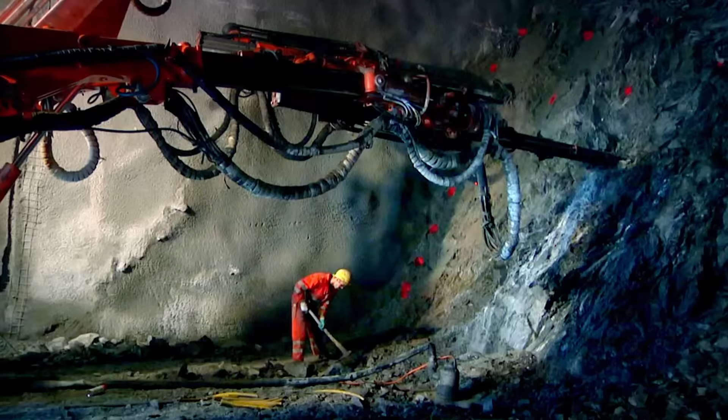Deep at the heart of the Swiss Alps, under millions of tons of rock, engineers are building a technological masterpiece, the Gotthard Base Tunnel. It will be a jaw-dropping 57 kilometers long, the longest tunnel in the world. It is the pinnacle of tunnel engineering.

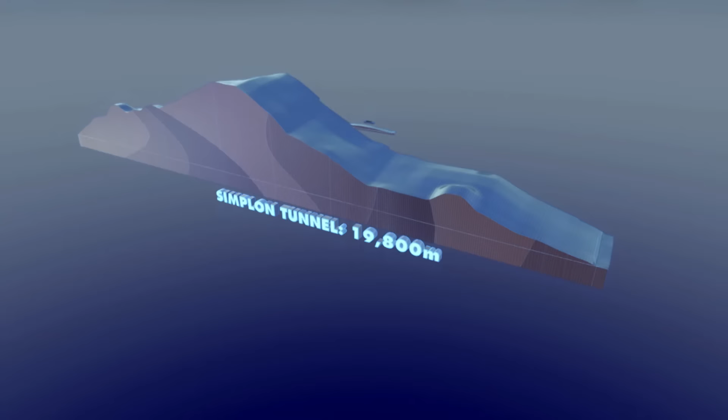The Gotthard Base Tunnel owes its success to 6 landmark tunnels. At the heart of each lies a major technical innovation that allowed engineers to drive their tunnels ever further. One by one, traveling up the scale, we'll reveal the incredible stories behind these astounding feats of engineering and the inventions that allowed them to grow ever longer. 6 ingenious leaps forward, from big to bigger, into the world's biggest.

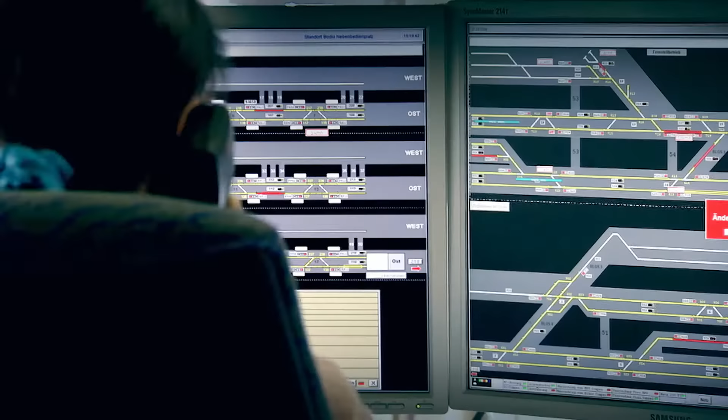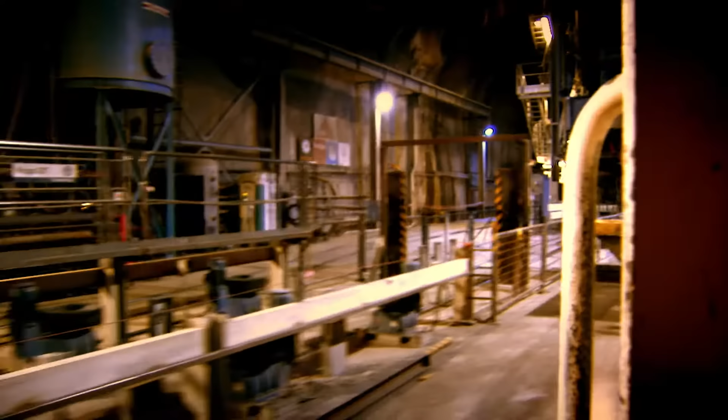Every day, 2,000 workers descend into the dark recesses of the Swiss Alps. Ignoring human beings' innate fear of going underground, they brave the heat and dust to complete a mammoth engineering project. Their mission is to build a tunnel that will solve one of the biggest traffic problems in Central Europe. There are only 4 roads across the Alps, all of them badly congested. But now the Swiss are about to break the gridlock.

They will link their biggest city, Zurich, to Milan in northern Italy. From 2017, high-speed trains will make the 200-kilometer trip faster than an aeroplane. But to make this happen, the Swiss must overcome a huge obstacle. They must break through the Gotthard Massif, towering over 2 kilometers above.

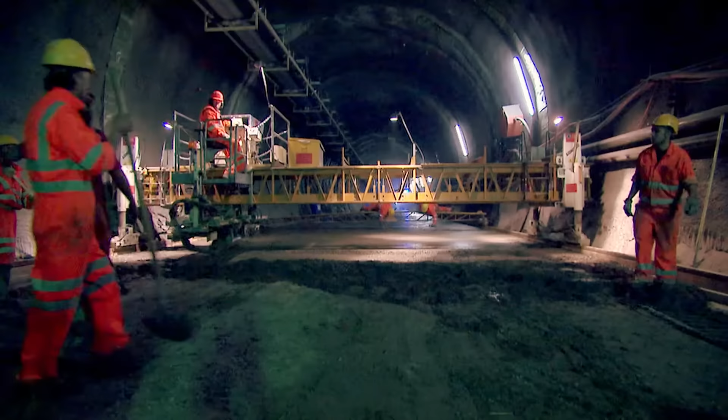If anyone can do it, it's the Swiss. They have turned tunneling into a fine art. For the last 13 years, men and machines have been working round the clock to build their masterpiece, the Gotthard Base Tunnel.

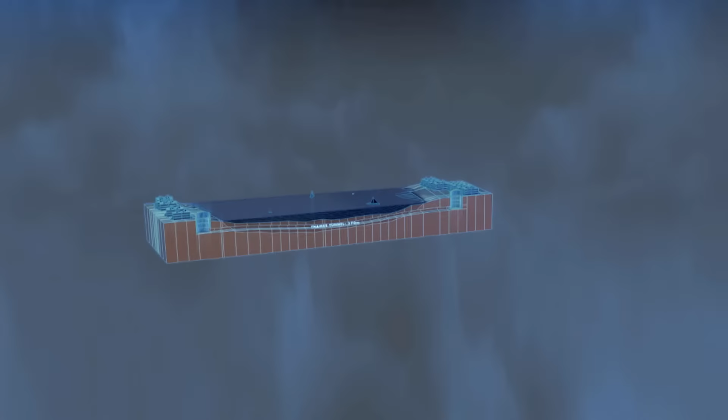To understand how the Gotthard Base Tunnel can be this big, we must travel back in time. In the 19th century, London engineers wanted to build the world's first underwater tunnel beneath the River Thames. But first, they would have to stop the weight of the river from crushing it.

Traffic problems in London are nothing new. It may seem bad today, but it was even worse 200 years ago. In the 1800s, this is the busiest port in the world by miles. Britain is a dominant imperial force and all its trade, or most of its trade, comes through the port of London. This thing is stacked 20 deep with tall-masted ships going across the river. So bad is it, in fact, that to get your freight from one side to the other could take you longer than putting it on a cart and taking it to Scotland.

The trouble is that the bridges across the Thames are badly congested, and building new ones just isn't an option. You want to get from one side to the other, and bridges are really difficult. They're difficult here because you've got tall-masted vessels, and to get underneath the bridge has got to be really, really high, and the approach ramps will end up being miles long. A bridge is not the answer.

Then a French engineer called Marc Brunel has a vision: a tunnel under the Thames. But Brunel knows that digging such a tunnel is fraught with danger, as the ground under the Thames is extremely treacherous.

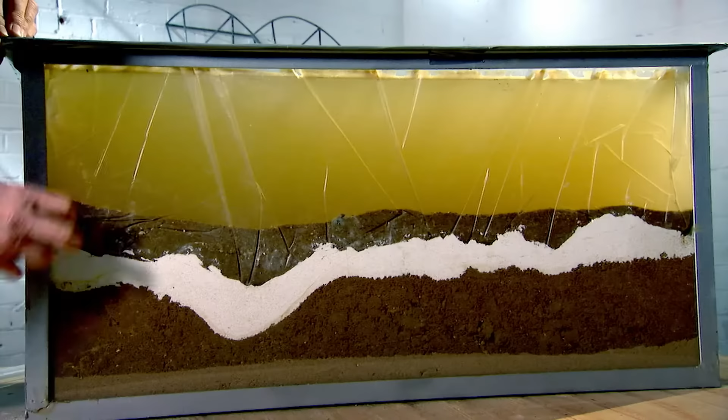Here we have the Thames in a jar, or a fish tank, to be more precise. And what we see is the River Thames looking suitably murky, and on the bottom of the Thames, alluvial sands and gravels and things like that. Underneath that, we've got a layer of clay, and that's good stuff to tunnel through. It's the stuff we want to find.

The challenge for a tunneler is to stay within the good tunnelling ground. If you drift too far out of it, you're in trouble. So let's have a go with our tunnelling device, shall we? I'm going to try and stay within the white band, which is our clay band. Oh, and we can see the water coming in there. So I've bust through, and there we go. Welcome to the River Thames.

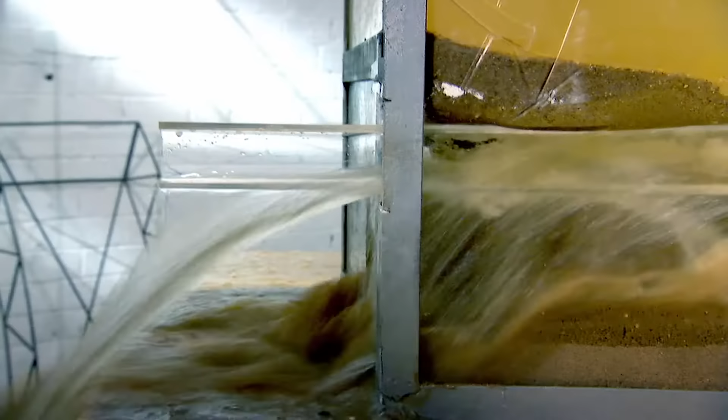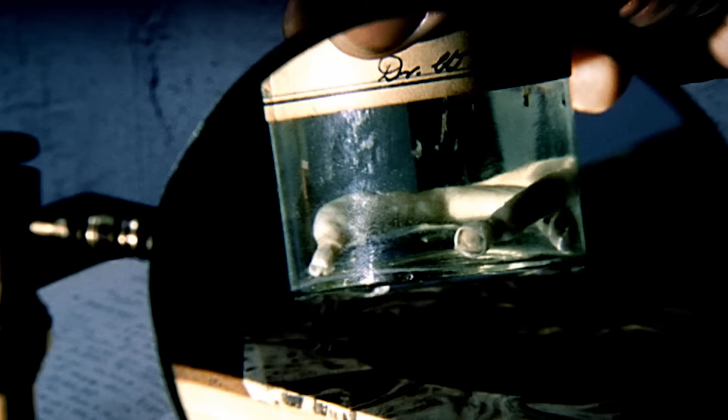But Marc Brunel thinks he has the solution. He finds inspiration in an unlikely place. Marc Brunel is working in the Chatham dockyard, and he's working in a land of wood. Ships are made out of wood, and he notices that there's a little mollusk called the shipworm that burrows its way into timber, but he's struck by how does the shipworm do this, and why doesn't the tunnel squeeze in on them afterwards? The shipworm is a clam that wears its shells on its head.

The shells have serrated edges. They can cut through even the toughest wood as the shipworm pushes forward. But there's a problem. Wet wood swells over time. This could close the tunnel and squash the animal.

So the shipworm has a clever trick to stop this from happening. It secretes a slimy substance that hardens into a tough protective shell around its soft body. As the shipworm advances, the rigid lining keeps the tunnel from collapsing.

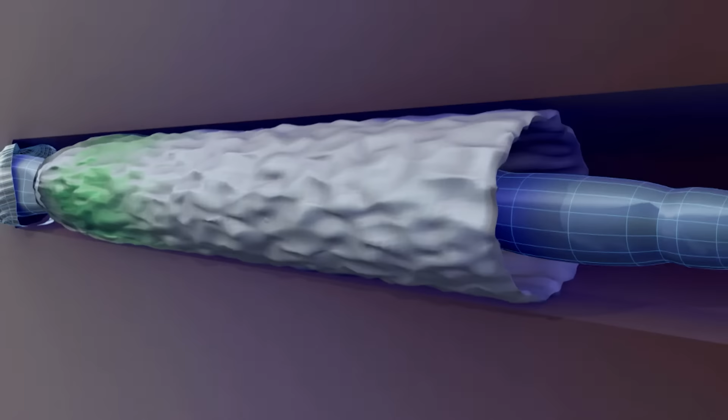What Brunel does is what lots of people have done through time: they've found a problem that looks just like theirs, and realized that if they can replicate the key parts, they can use the solution somewhere else. Here he's figured out that the shipworm is actually solving the same problem as him. It's boring through something that wants to squash down afterwards.

Marc Brunel builds a machine that uses the tricks of the shipworm on a huge scale. He calls it the tunnelling shield. The machine is made of 36 iron frames that each hold one miner. Wooden boards shield them from the unstable workface. They remove one board at a time and dig out 10 centimeters of mud.

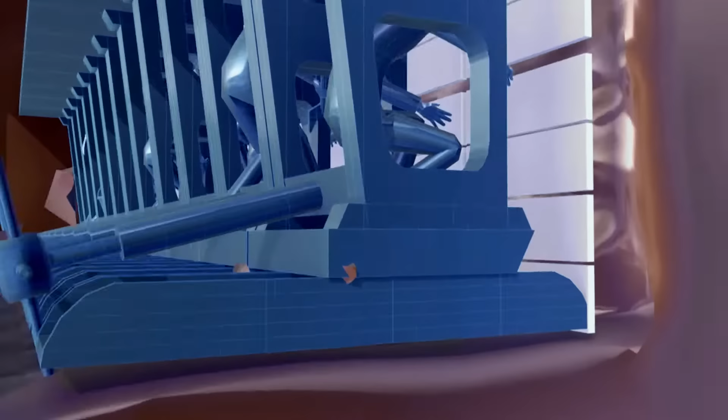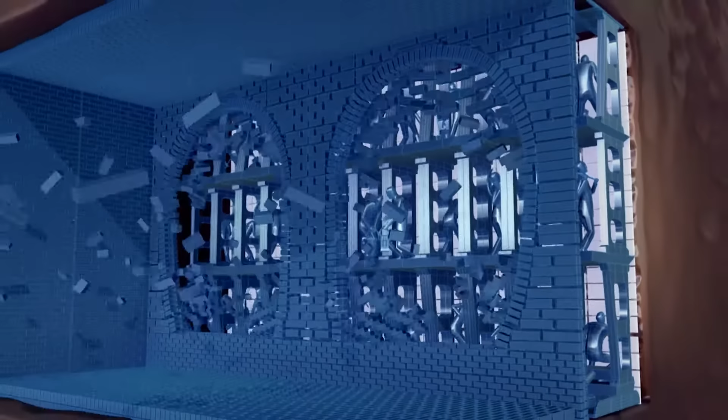Once they've taken away a whole layer of mud, they use jacks to push the frame forward. This exposes a narrow gap of unsupported mud. Like the shipworm, Brunel immediately lines the passage before it collapses. He uses bricks and extra strong cement to create a sturdy twin-bore tunnel. This machine becomes the key to tunneling under the Thames.

Brunel's Thames tunnel survives to this day, but it shows no trace of the horrors that the workers endured to build it. Where we are now is at the bottom of the Rotherhithe shaft. And the men would have come down from Rotherhithe every day, and they would have climbed up the ladders onto the shield with their picks and shovels, and away they would have gone.

And at the beginning, I imagine it was pretty much okay. They'd have been figuring out how to use the shield, but the ground here isn't that bad. But once they got down into the middle, it would have been a pretty hairy business, especially once they got right underneath the river.

Brunel's shield stops the tunnel from collapsing, but it offers no protection from the filth under the River Thames, which in those days is an open sewer. They can only work for 2 hours at a time because methane is being released from all this rotting crap on the bottom of the Thames.

Some of them will be getting sick, so they would be taken to the back, slapped about a bit, they'd revive, and they'd go back and do another shift. It's desperate stuff. The stuff they're digging through at its worst is so horrible it'll rot your fingernails.

Today, it takes only 45 seconds to travel through the tunnel that took Brunel's team 18 years of toil to build. And they couldn't have done it without his mechanical mollusk.

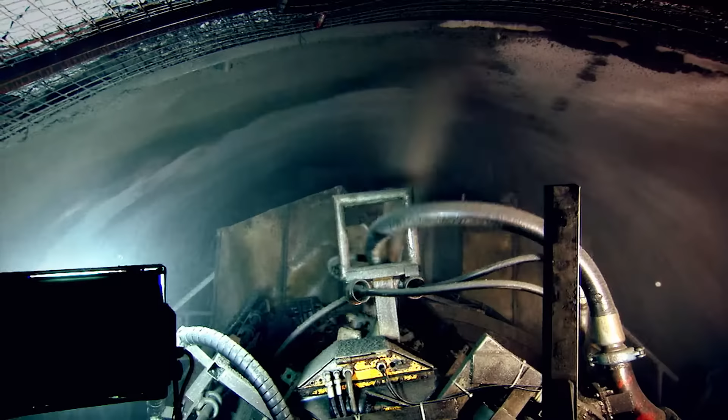Brunel's idea was so brilliant that the principle is still used today on the Gotthard Base Tunnel. The team working at the face also strengthened the tunnel walls immediately. Only instead of bricks, they spray on a special concrete that hardens extremely quickly. It's called shotcrete. The shotcrete forms a stiff tube around the tunnel that stops it from caving in on the workers.

It is the ultimate reincarnation of Brunel's mechanical shipworm. But sometimes the ground the team are tunneling through is so treacherous that the shotcrete alone can't do the job.

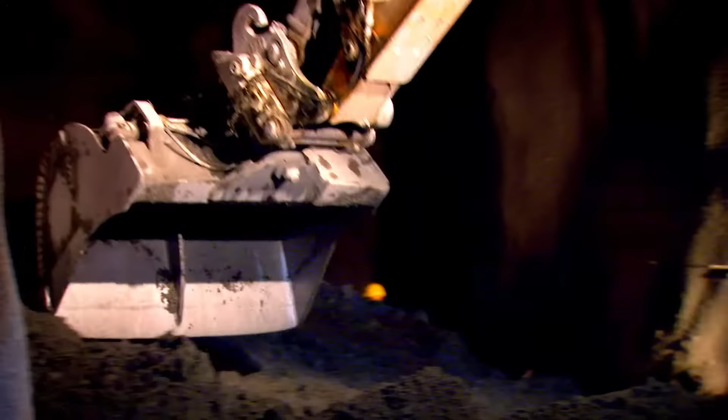We are drilling the tunnel in very bad geological conditions. You can see here the quality of the rock. It is soft rock, and this rock will close. It is a squeezing rock.

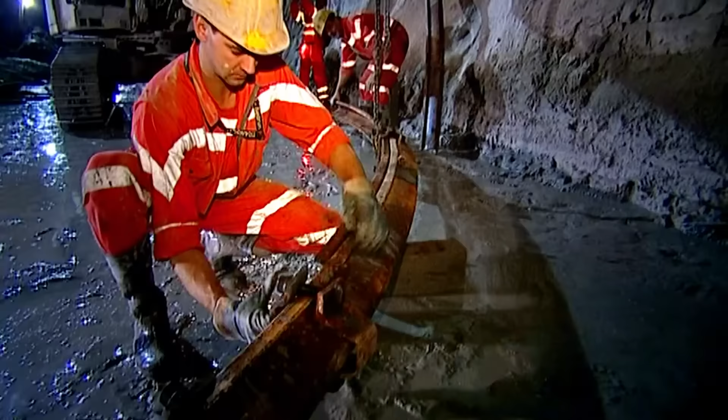The soft, squeezing rock could easily bring down the tunnel, so the engineers must strengthen it with steel arches. But to survive the force of the mountain pressing down, these arches have to be very special. If the engineers used arches made from long steel beams, the crushing pressure from the mountain could prove too much for them.

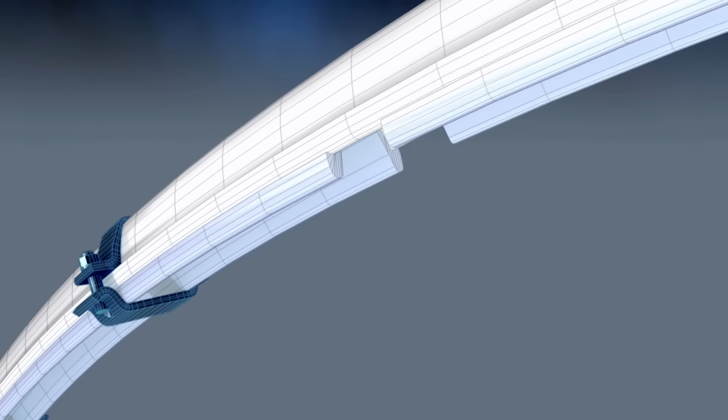So they use arches made of many short segments. Each segment overlaps with its neighbor. They're tied together with steel clamps that still allow them to slide over one another. As the mountain squeezes down on the arches, friction between the arch segments gets stronger until they finally lock together. And once the mountain settles, the arches are secured with shotcrete.

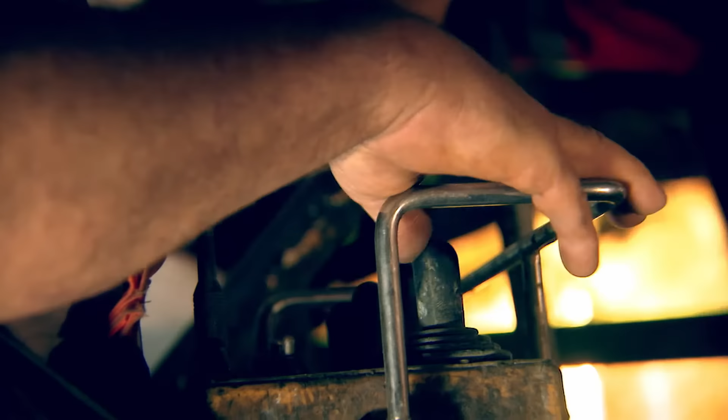The engineers at the Gotthard have learned their lesson. The key to stopping their tunnel from collapsing is not to fight the mountain, but move with it.

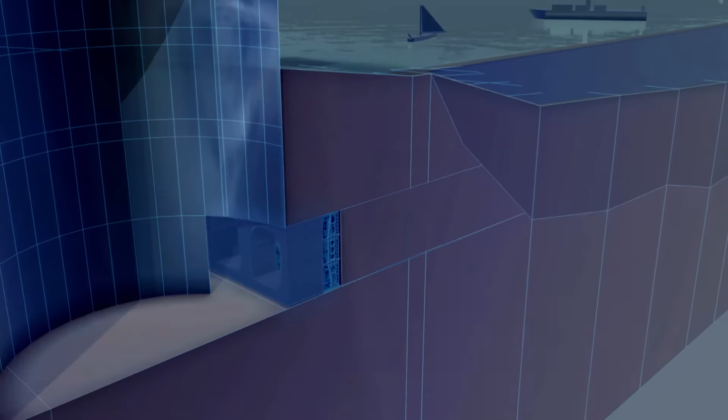In 1825, Brunel's tunneling shield revolutionized engineering. But excavation was still done by hand and was painfully slow. To take the next leap in tunneling evolution, engineers had to overcome this problem.

To build the much longer 3-kilometer box tunnel through solid limestone, they would have to find a faster way to excavate.

In 1833, the port of Bristol decided to build a railway line to London to boost trade. The man they picked to do the job is Marc Brunel's son, Isambard. This guy is so ambitious, it defies belief. He's in his late 20s and he goes for the biggest railway gig in the land, not a small thing. He's 25, 30 years old, and he is going to build the most speedy, comfortable railway ever seen.

Brunel surveys a 200-kilometer route on the flattest possible path between London and Bristol. But just before the end, he faces a formidable obstacle, Box Hill. If Brunel lays his track up and over the hill, the slope will be too steep to climb. If he lays the track around the hill, the detour becomes too long.

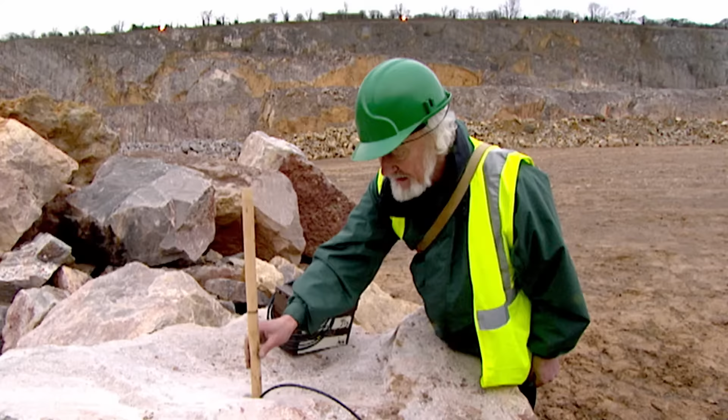What you must not do when compressing it in the hole is use a steel tool, because if you have any sparks at all, the gunpowder will ignite. Now what I've got to do, I'll take my explosives out of the way, and I'll use some gravel and put it on top of the gunpowder in the hole. This will confine the gas which is generated and cause it to exert its pressure for as long as possible on the rock. It's all done with pressure.

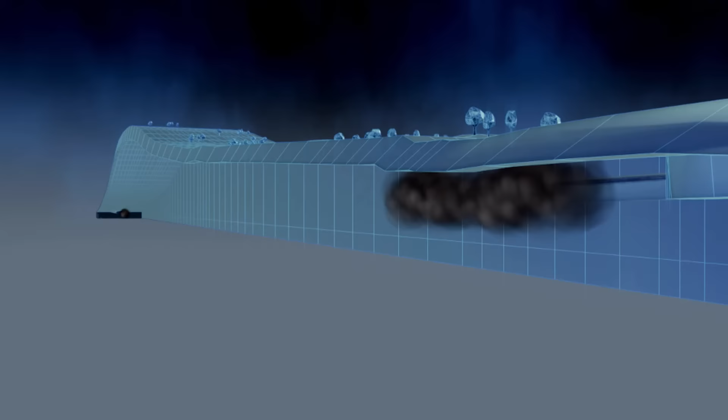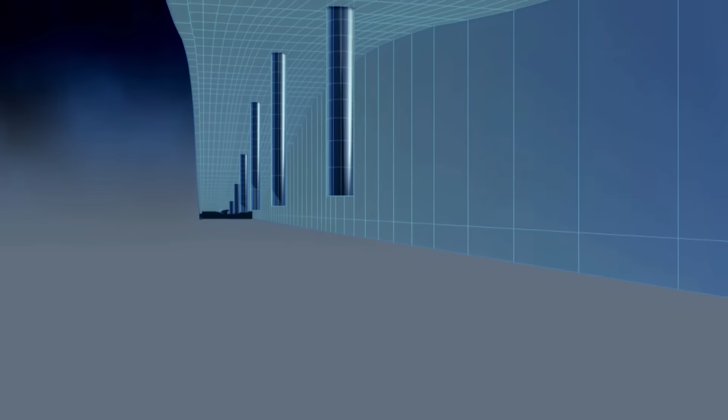Gunpowder becomes Brunel's weapon of choice. He starts by blasting into Box Hill from both ends to speed up the digging. And to accelerate it even more, he also drives 8 deep shafts down through the hill along the tunnel's proposed route. These shafts create 16 extra tunnel faces inside Box Hill, so more crews can attack the mountain from many fronts.

But the blasting has a serious side effect. Gunpowder generates, when it explodes, quite a lot of gas: steam, hydrogen sulfide, sulfur dioxide, and carbon monoxide. Carbon monoxide is intensely poisonous, and if you have several such bangs as this going off in a confined space, if you breathe too much of it for too long, you will become unconscious and you will die.

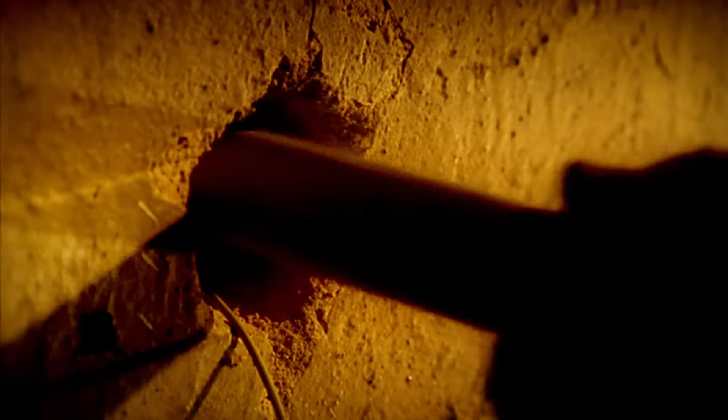Brunel uses a ton of gunpowder a week, which makes the tunnel a deadly place to work in. When Box Tunnel opens, it becomes the longest railway tunnel in the world. But over 100 men have lost their lives building it.

Today at the Gotthard Base Tunnel, the explosives are more powerful and safer than gunpowder. But the principles of drilling and blasting have not changed since Brunel's time. The crew must put their explosive charges in precisely the right place, otherwise their tunnel will end up the wrong size.

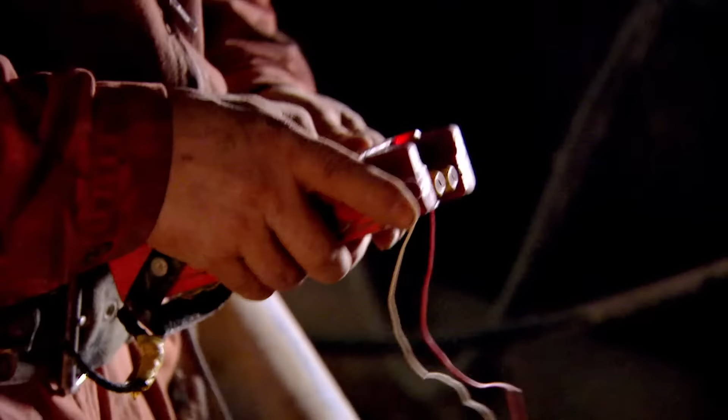Of course, there's a real art to drilling and blasting. I mean, rock is not a uniform material. It's got lots of different fracture lines in it and all the rest of it. And you're trying to get a hole precisely the right size, or pretty much the right size. If you get the charges in the wrong place, you end up taking great big lumps out, which is bad news because you have to fill it up and use more material. Or you don't blow enough out and you end up having to blow it up again. Understanding the effect of your charges is quite an art.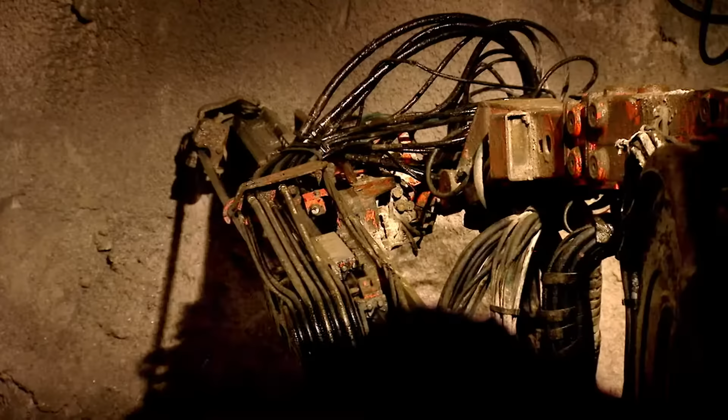But the builders at the Gotthard Base Tunnel aren't going to get it wrong. They have an amazing machine to drill the holes for the explosives, called the Jumbo. It has 3 laser-guided drilling arms that are computer-controlled and programmed with the exact dimensions and coordinates of the tunnel. They can drill a 4-meter deep hole in 2 minutes, accurate down to a few centimeters. The Jumbo creates a perfect pattern of boreholes, guaranteeing that when the blasters set off their charges, they can be sure to hit the right spot.

Back in 1841, Box Tunnel proved that blasting can speed up tunneling, but is also deadly.

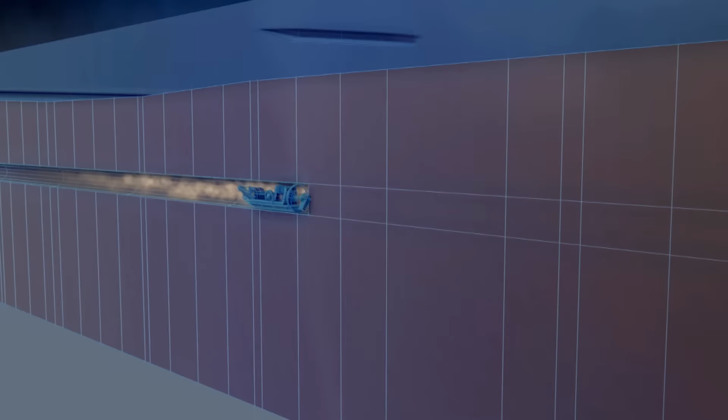At the end of the 19th century, Liverpool is one of the busiest cities in Britain, but many of its workers have a difficult commute. They have to cross the Mersey estuary by ferry. In 1877 alone, 26 million passengers take the slow boat from Birkenhead to Liverpool. What they need is a faster way across the Mersey.

So in 1879, engineer Francis Fox and a crew of 700 men begin blasting a tunnel under the estuary. They're trying to blow a bloody great big hole, and there's only a few feet of rock above them, and on top of that you've got the Mersey estuary. So the blokes start getting a bit concerned about this, and in fact Francis Fox, who's the chief engineer of the job, he comes down every night towards the end of the night shift just to check that everything's all right and the boys aren't getting sloppy, and he comes back one day and he's reported to have said that they're in a constant state of fear.

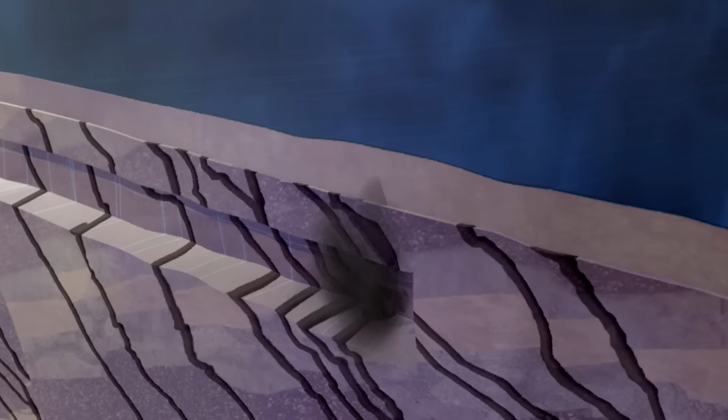Francis Fox's men believe that blasting under the Mersey is a recipe for disaster. The rock beneath the estuary is riddled with faults. The men fear that shock waves from the explosions could rip open these faults and bring the Mersey crashing down on their heads.

Francis Fox must keep up the pace of the work, but keep his men safe. So he introduces them to a machine that can bore tunnels.

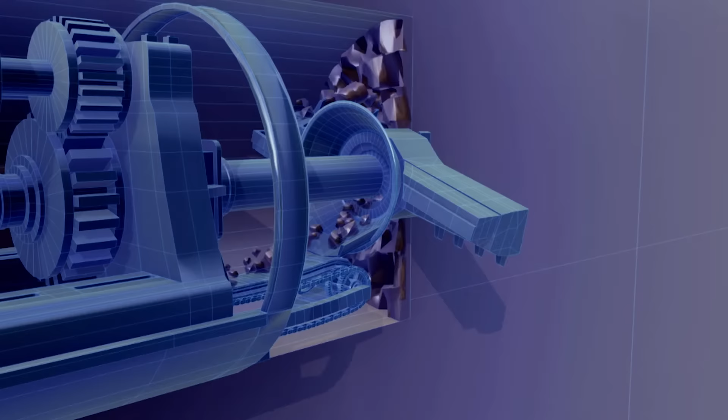The front of the machine has a huge rotating arm. This is fitted with sharp iron teeth. The teeth bite into the rock and rip out small chunks. As the machine pushes forward, the debris drops onto a conveyor belt and is carried out of the tunnel in railway tubs.

To move the drill on, hydraulic jacks lift the top of the machine off the ground. The frame then slides forward and the cycle starts again.

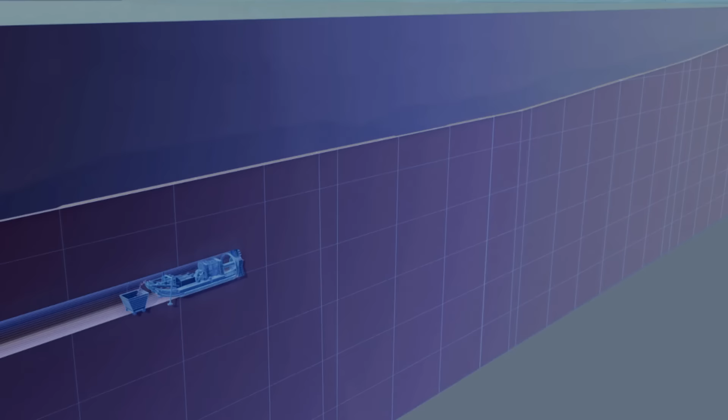The boring machine does wonders for the Mersey tunnel. It can dig up to 60 meters a week. On the 1st of February 1886, the Mersey Tunnel opens to the public and 36,000 people travel through it. To this day, it is the fastest way to get across the Mersey.

Before the first passenger can travel through the Gotthard Base Tunnel, the builders need to excavate over 20 million tons of rock.

For this Herculean task, the tunnel boring machine has had a bit of an upgrade. It's now as long as 4 football fields and has a cutter head that spans nearly 10 meters. This metal monster can munch its way through 40 meters of rock every day.

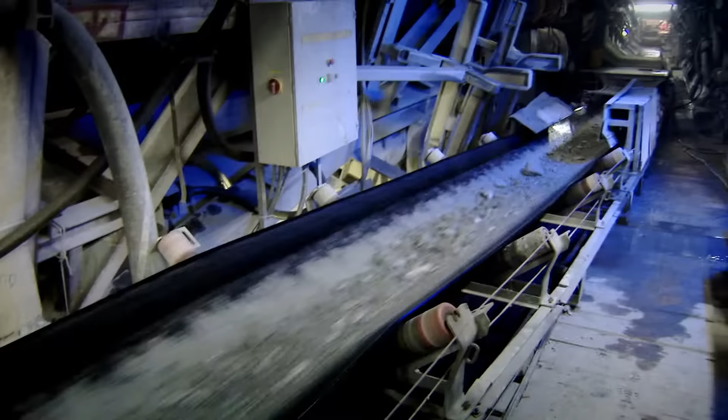On a good day, it can rip 6,000 tons of rock out of the mountain. And then, amazingly, it puts the rocks straight back in. Nearly a quarter of the material carved from the mountain is recycled and turned into concrete. This is sprayed onto the tunnel walls to keep the tunnel open, or spread on the floor to prepare the bed for the train tracks.

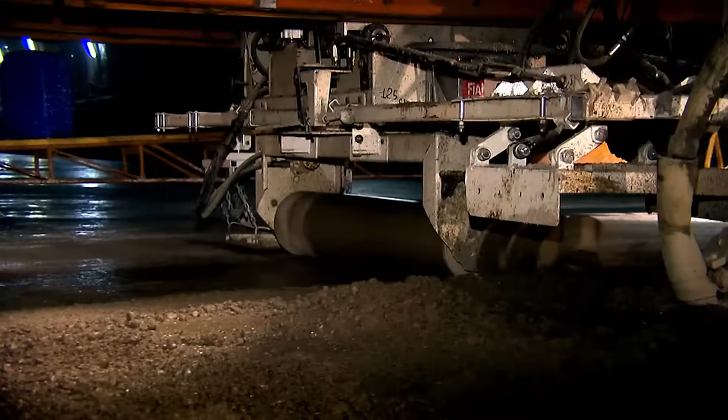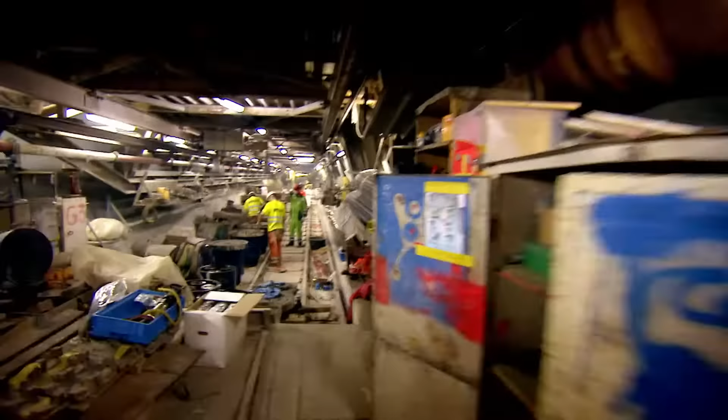The tunnel boring machine is a gigantic rock-eating factory. At the front, the cutter blades scrape the rocks from the tunnel face. Buckets in the rim scoop up the spoil and funnel it onto a conveyor that takes it away for recycling. Behind the cutter head, mechanical arms bolt protective steel mesh to the tunnel walls.

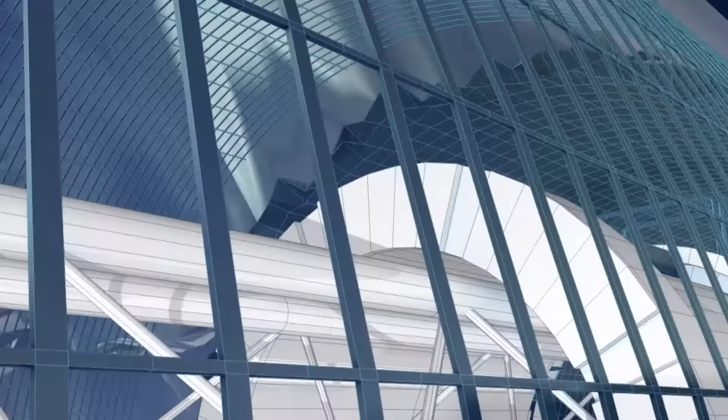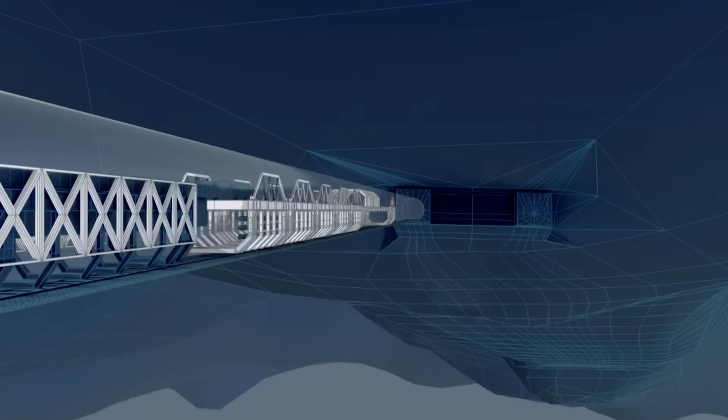A robot then cements the mesh in place with shotcrete. Hydraulic feet shunt the machine forwards so it can keep up with the cutter head. Then workers lay a concrete bed for the railway track. At the end of this production line, the finished product emerges.

This machine is the ultimate tunneling tool, even when it comes up against some of the toughest rocks on the planet.

We're now in a granite part of the tunnel, which is one of the hardest and most abrasive rocks. It will dig about 20 to 25 meters a day in this kind of rock, and it will take out 3,000 to 5,000 tons of rock every day.

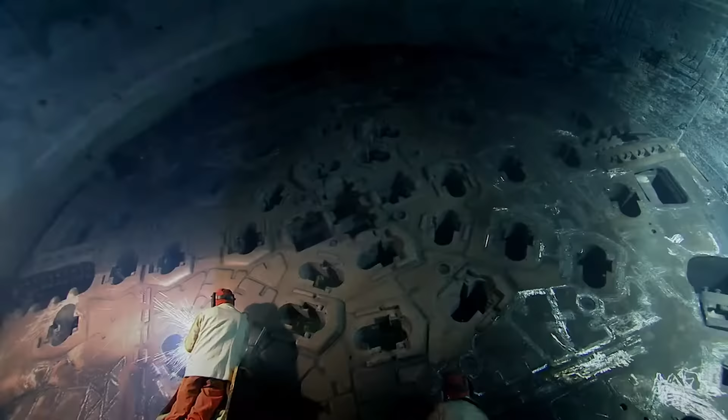So tough is the rock that the crew must replace worn-out cutter discs every day to keep the machine going. Digging through granite is a war of attrition, but the tunnel boring machine at the Gotthard is winning. Without the tunnel boring machine, it would take up to 30 years to dig the tunnel, which would of course be impossible.

Back in 1886, the boring machine used in the Mersey tunnel made tunneling faster and safer. But as tunnels grew longer, a new problem emerged.

To drive the Simplon tunnel 19 kilometres through the Swiss Alps, engineers had to find a way of delivering fresh air deep into the heart of the mountain to stop their workers from suffocating.

The 19th century is the age of the railway. Iconic trains like the Orient Express take passengers from Paris to Istanbul in less than 3 days. International travel becomes all the rage.

What's missing is a fast connection from Northern Europe to Italy and its popular tourist destinations. But there's a formidable obstacle blocking the way: the Alps. Trains have to negotiate steep and winding tracks to get across these mountains. To save the steep climb, the Swiss decide to drive a passage straight through the base of the mountain at one of its narrowest points.

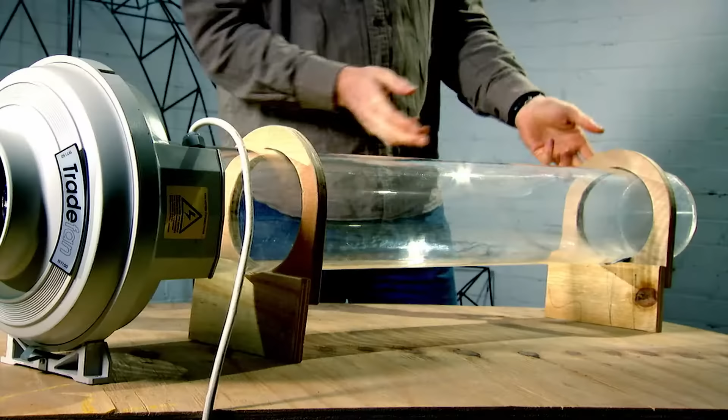He realizes that one of the biggest killers under the Alps is poor ventilation. The longer a tunnel gets, the harder it is to ventilate the face. And that's really important because down at the face is where all of the toxic gases are produced by the dynamiting. And so you need to get these gases out of the way so that they can get safely back to the face and do their job.

So first of all, we need to introduce some smoke to our tunnel face. And if we tuck it in there, we can see the smoke starting to fill up the space.

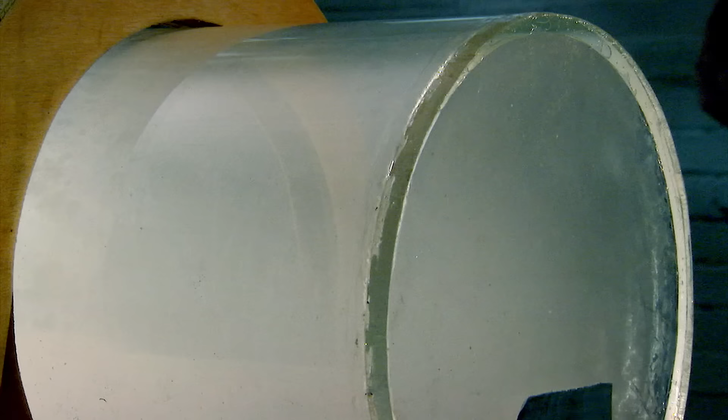Ed now tries to flush out the smoke with a fan mounted at the entrance. But the smoke is still there, it's not going anywhere. The basic problem here is there's nowhere for the air to go, so all the fan is doing is squeezing the air in the tunnel. Smoke and dust all stay at the front, and of course, the blokes down there are still trying to work.

Now, there is a solution to this problem, and that's to allow the air to go somewhere. Here we have a tube, just like we had before, only this time it has a key difference. We've got a chimney on it. That should make all the difference.

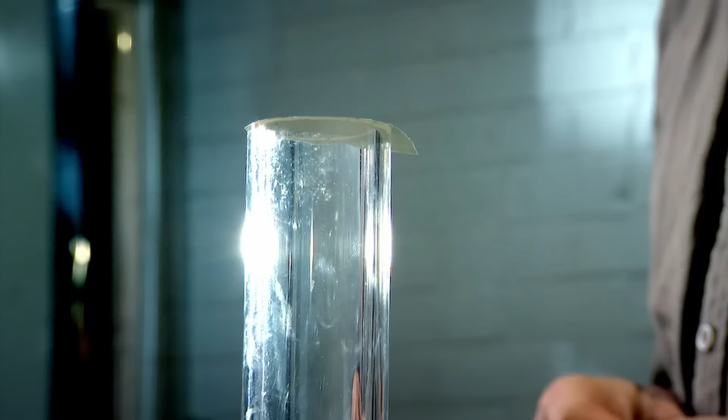The tunnel is full of smoke, and we'll see what happens when we switch the fan on. And it runs up to speed. First of all, we see that not much happens, but that's because I've left the lid on the chimney. If I take the lid off, we see the smoke come venting out, and actually the tunnel gets cleared very, very quickly. And it's as simple as that. What happens is that the fan generates a high pressure which pushes the air along into the low pressure area outside the chimney. Simple as that.

Unfortunately for Alfred Brandt, digging chimneys in the Alps through thousands of meters of rock is not an option. But he won't let the mountain defeat him. He comes up with a simple but radical solution to his ventilation problem.

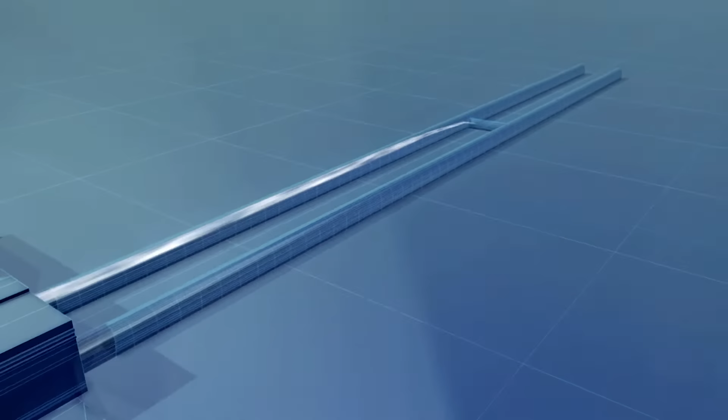Instead of one big tunnel, Brandt builds two smaller ones. He fixes powerful fans to one entrance, and 200 meters inside the mountain, Brandt connects the two tubes with a cross passage. Now a powerful draft of fresh mountain air enters one tube and pushes the noxious fumes out through the other. He builds a cross passage to link the tunnels every 200 meters.

As the men burrow deeper into the mountain, they seal the cross passages behind them. This redirects the fresh air to the workface. Brandt's men can now breathe more easily. His twin tunnel system is literally a lifesaver.

In 1905, the Simplon is finished. It is the longest railway tunnel in the world and shaves half a day off the travel time to Venice.

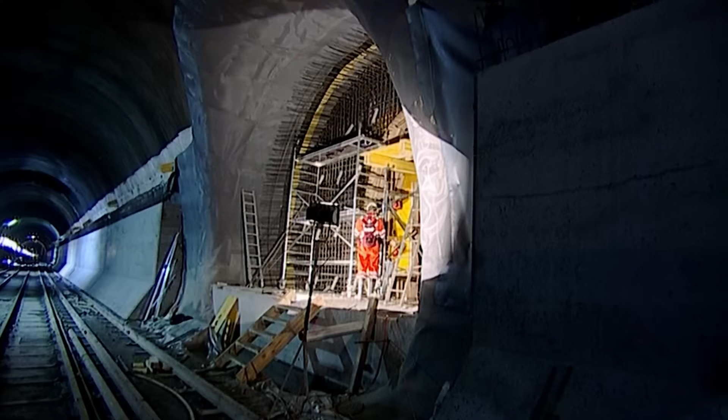So good was Alfred Brandt's idea that engineers on the Gotthard Base Tunnel still use it today. Their tunnel also has two tubes linked by cross passages that direct fresh air to the workface. But now there's another problem the engineers on the Gotthard have to solve.

As the workers make the 2-hour train journey to the tunnel face, it's like driving into an oven. Getting hotter and hotter in here - that's one of the challenges. Keeping the workers cool is a top priority on the Gotthard project.

The tunnel is baked by heat rising from the center of the Earth. The huge mass of rock overhead traps the heat in the mountain and pushes temperatures in the tunnel up to 45 degrees Celsius.

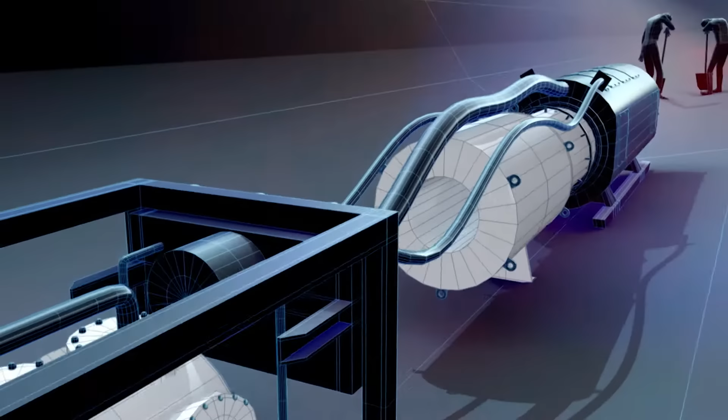Engineers install 30 huge refrigerators that generate cold air to cool the workers. But the pumps powering the coolers heat up in the process, which could cancel out the cooling effect.

So the Swiss use a natural resource to solve the problem. We use water, lots of water - up to 1,000 cubic meters of cool water, which gets into the tunnel and through the coolers, and then gets back out of the tunnel to be cooled down again.

We devote about half the energy of construction of the tunnel to cooling alone. The Swiss engineers have built a gigantic web of cooling pipes that reach into every corner of the tunnel.

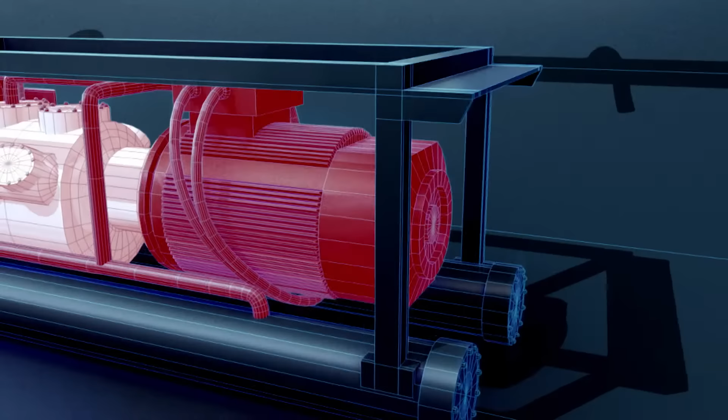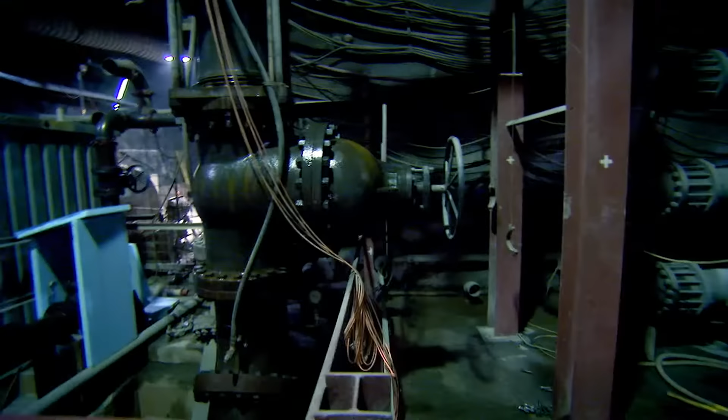The pipes push cold water through the cooling machines. The water absorbs the excess heat and carries it out of the tunnel. This is the mother of all aircons, and without it, the Gotthard Base Tunnel would be impossible to build.

In 1905, the clever ventilation system of the Simplon tunnel allowed miners to breathe freely and dig further. But as tunnels grew longer, a new challenge emerged. To build a 50-kilometer tunnel between France and Britain, engineers on both sides of the English Channel had to reach a new level of accuracy to make sure they met in the middle.

There's one place that has captured the imagination of tunnel builders like no other: 34 kilometers of water separating Britain from the continent - the English Channel. Ever since the Industrial Revolution, engineers have dreamt about connecting France and Britain through a gigantic tunnel under the sea.

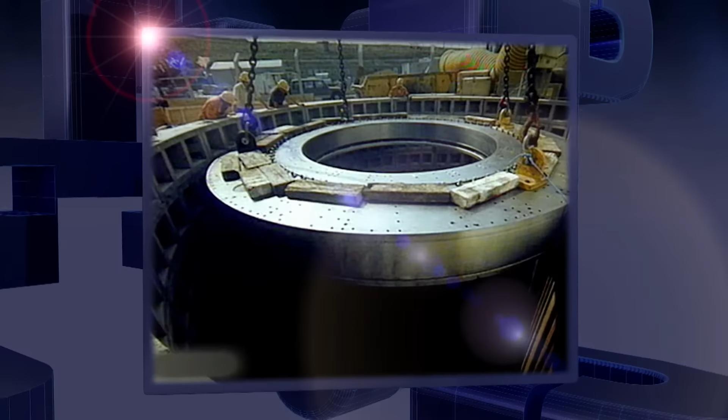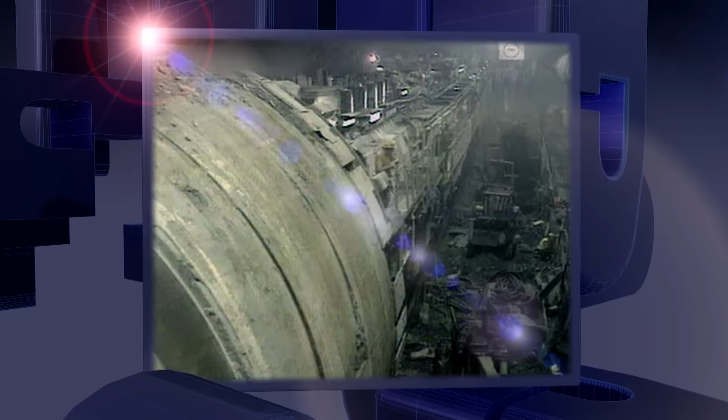In 1987, that dream becomes a reality. Work begins on the Channel Tunnel. It will be over 50 kilometers long and lie up to 120 meters below the seabed - the engineering challenge of the century.

To build it, the tunnelers must find the perfect geological conditions. In this little experiment, we've got 3 different ground types, and we're going to see what it's like to tunnel through them. I have here my tunnel boring machine, and I'm going to start in the middle. Now, this is sand, and if I turn the tunnel boring machine on...

What I rapidly see is that it's easy to drill through, very easy to drill through. But when you look in there, you realize that it's all fallen to pieces. That's the essential problem with soft ground - it's easy to move, but it falls on your head.

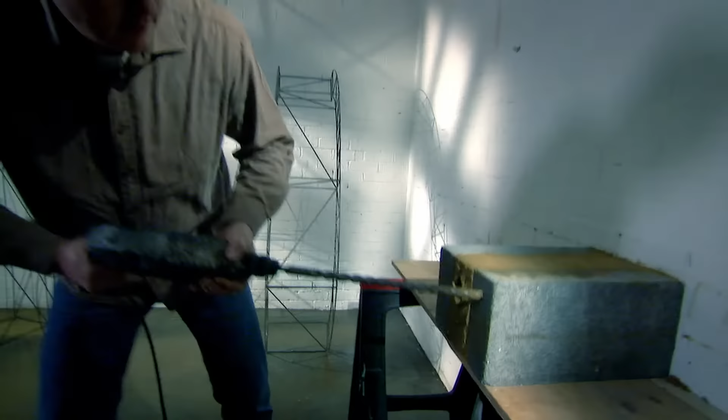Let's have a go at this one here - this is like a granite. Now, this is a much, much harder material. I was only doing that for a couple of seconds, but already my arm is beginning to ache. Tunnelling through this stuff is really, really hard work. Of course, it holds a lovely hole, and it's not going to fall on your head, it's just really hard digging. So again, not something that tunnellers prefer to dig in.

Let's have a look at this third type here. Now my tunnel boring machine is able to fly through this, but the hole is also self-supporting. This type of material is really what tunnellers like. It's a bit like the chalk marl you get under the English Channel.

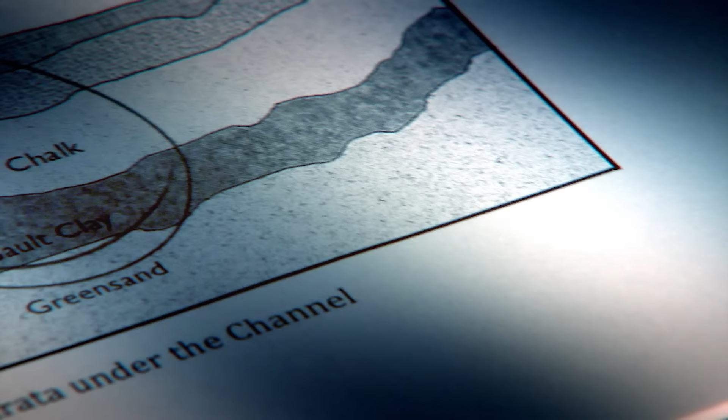Chalk marl is a malleable yet firm variety of limestone that is also waterproof. Luckily, geologists find a thick and continuous layer of this dream material under the channel. But the chalk creates a new challenge for the engineers.

The easiest way for them to get across the channel would be to start at both ends and dig the tunnels in a straight line so that they meet in the middle. But the tunnel tube must stay inside the layer of chalk, which twists up and down - so the channel tunnel can't be straight.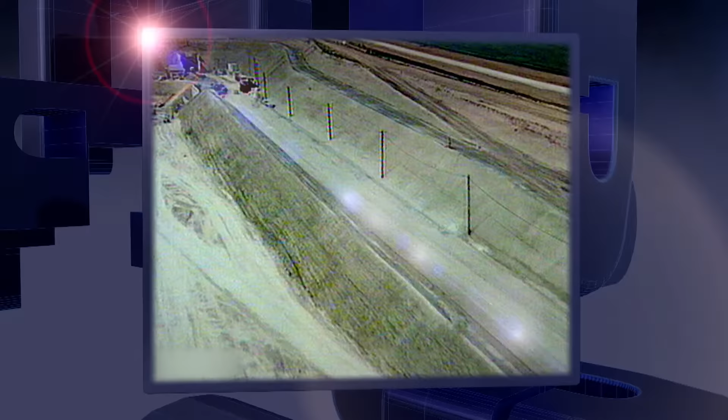The engineers must constantly change course to follow the chalk layer. Now, making sure that their tunnels meet in the middle becomes a real challenge. Surveying a precise route above ground is easy because the builders can use visual references in the landscape. But doing this underground is extremely difficult. The basic problem in a tunnel is you can't see where you're going, and so the surveyors have got the devil's own job of following the chalk marl through.

In a 50-kilometer tunnel, even the slightest error will have huge consequences. The surveyors must find a way to stay on course.

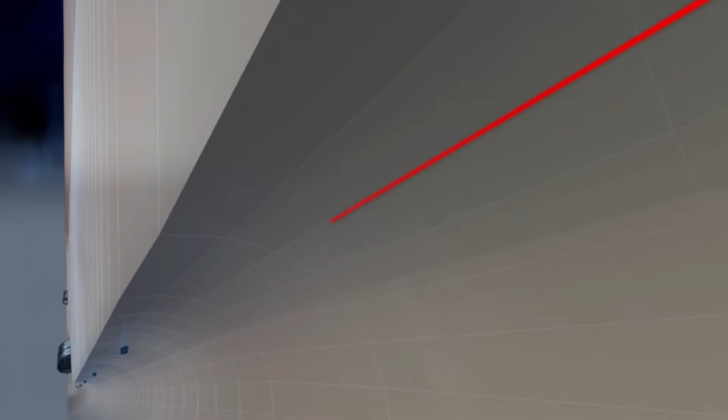First, they asked geologists to sink probes into the channel seabed to measure the depth of the layer of chalk. Then they plot a course right through the middle of it. They feed the coordinates to a laser, which fires its beam in the direction the tunneling machine needs to follow. To change course, the surveyors reposition the laser and point it in the new direction. By sticking to this path of light, both ends of the tunnel should meet in the middle.

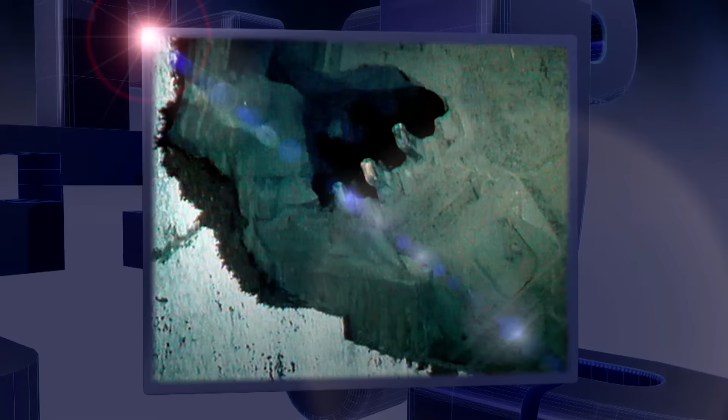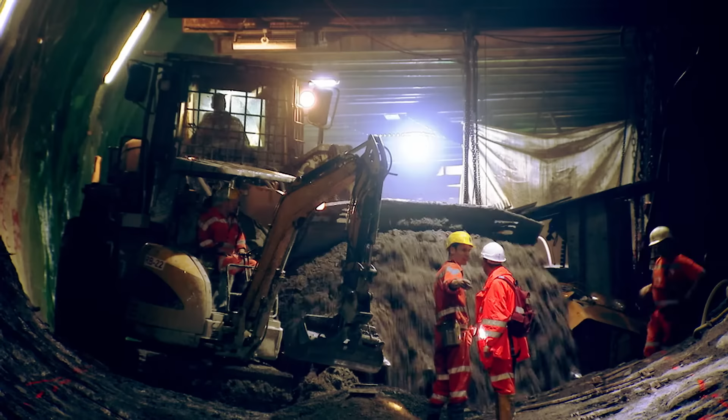On the Gotthard Base Tunnel, the engineers are wrestling with precision every day. Their tunnel has to curve round to avoid geological fault lines. And when they tunnel through soft, shifting rock, their tunneling machine is constantly pushed off course.

This is the man who wrestles with the mountain every day, Carsten Kunze, the driver of the tunnel boring machine.

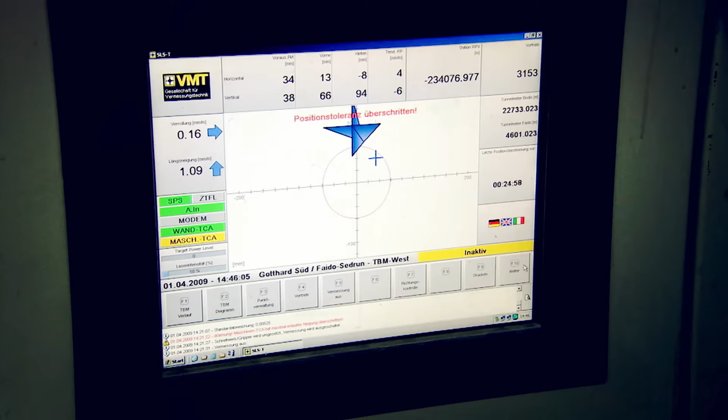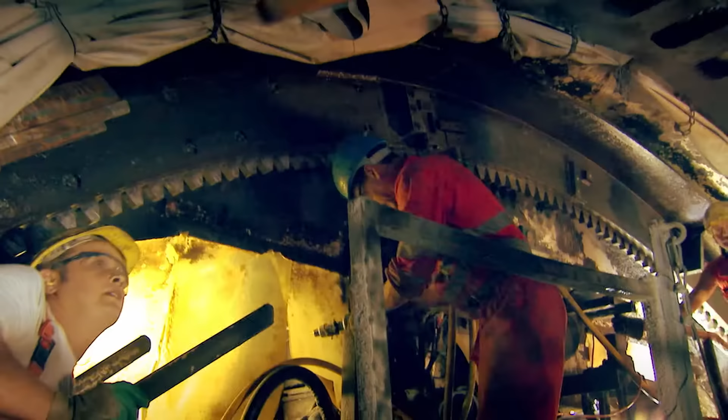But deep inside the Gotthard lie nasty surprises that not even steel arches can deal with. In June 2005, one tunneling machine hits a hidden fault in the rocks and gets trapped under tons of rubble.

To rescue their precious machine, the builders plan to blast an access shaft from the adjacent tunnel to attack the fault from behind. But they fear that the roof of the access shaft could become unstable and collapse.

So they drive in a second tunnel directly from the side. From here, they inject concrete deep into the crumbling rock. This sets to form a solid block and stops it caving in. Now they can safely blast away the fallen debris and free the tunneling machine.

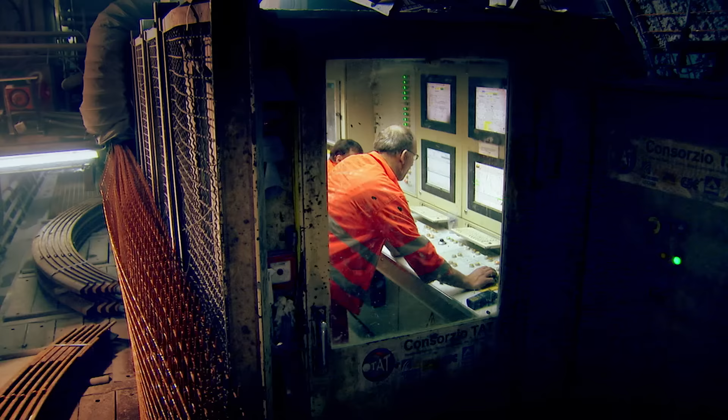With the fault line behind them, the builders are back on track, ready for the next challenge.

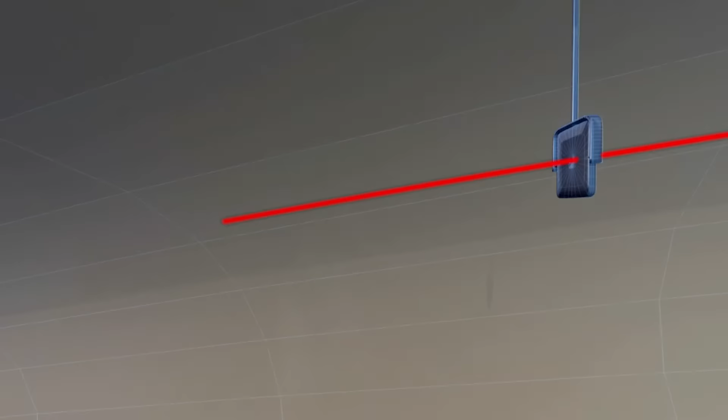Back in 1994, laser guidance allowed engineers to build complicated tunnels like the Channel Tunnel. Now they could make their tunnels almost as long as they desired.

But to reach the final stage in tunnel evolution, engineers have one last problem to overcome. Longer tunnels prove very difficult for people to escape from. So as Swiss engineers drive the Gotthard Base Tunnel into the mountain, they must also make sure they can get people out.

In 2001, the nightmare of any tunnel builder becomes a reality, just down the road from the building site of the Gotthard Base Tunnel. Two lorries collide in the Gotthard Road Tunnel and explode. Temperatures inside reach 1,000 degrees Celsius. Dozens of cars fuse together into a molten mass.

The fire burns for 24 hours. 11 people lose their lives. The Swiss are shocked. This was considered the safest road tunnel in Europe.

Today, the builders of the Gotthard Base Tunnel know that they must dispel people's natural fear of tunnels. They must make the world's longest tunnel super safe.

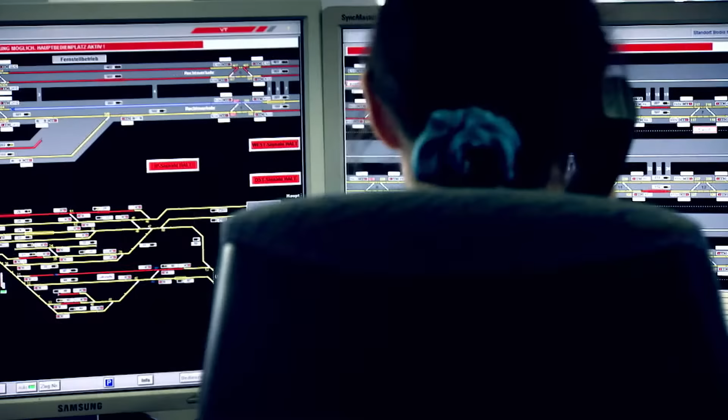There's no use in waiting for rescue in a tunnel like this. The time it takes for rescue troops to get down here may be far too long. With no time to wait for outside help, in an emergency, the trapped passengers must rely on being rescued from within. The Gotthard engineers rise to the challenge.

They build 2 emergency train stations deep in the heart of the mountain. These have 2 rescue platforms connected by a fireproof escape tube. If a fire breaks out on board a train, the driver stops at the nearest station. Fireproof doors slide open so that passengers can enter the escape tube.

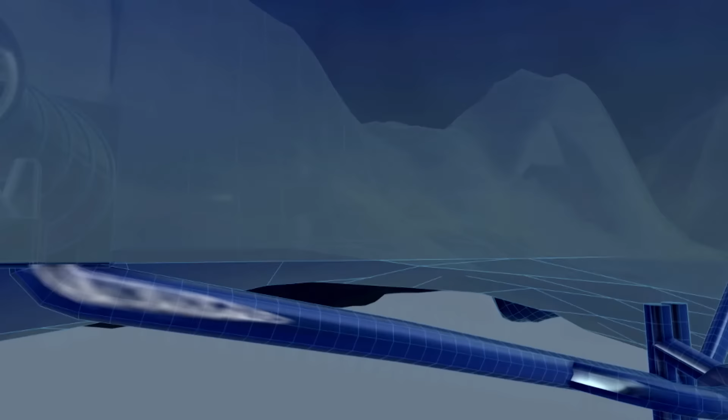Now the engineers must stop the smoke from following the same escape route as the passengers. The solution sits 800 meters above the tunnel itself. Powerful fans suck in fresh alpine air and push it down into the escape tube. This forces any smoke back into the main tunnel, away from the escaping passengers, who then cross over to the platform on the other side, a safe distance from the fire.

The Gotthard Base Tunnel is almost finished. The men have only 7 of the 57 kilometers left to dig.

When it comes online in a few years' time, their tunnel will completely transform traffic across Europe. The train promises to make a huge comeback in European travel and give aeroplanes and trucks a run for their money.

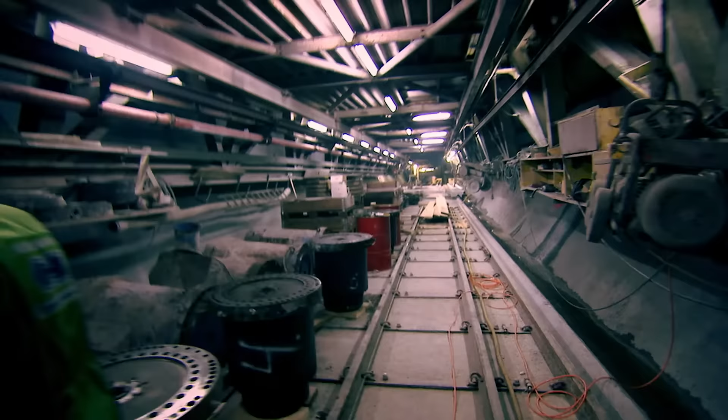But before the first passengers can speed through the tunnel, the workers need to rip millions more tons of rock from the mountain and pour yet more ingenuity into this milestone of engineering. When it's finished, the Gotthard Base Tunnel will become the biggest tunnel in the world, until someone builds an even bigger one.